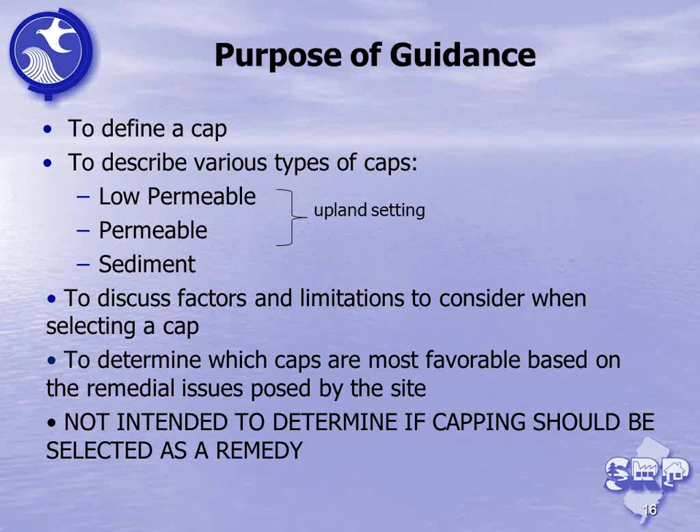Next slide, please. To help define the scope of the guidance document, the committee established several assumptions that I'd like to go over. We assume that the RI process is complete. You know, you went through the PA and SI and remedial investigation process as well as filling out your receptor evaluation form. In terms of containment, which we consider the lateral movement of contamination, that particular movement is really not the focus of the guidance document.

A good example of the lateral movement of contamination and a remedial option to address that would be like a slurry wall. This guidance really focuses on the vertical plane, so that the capping remedy in that instance would address direct contact concerns.

As with any other remedy, a lot of site-specific information needs to be available, and we're assuming that that's been collected and is accurate. A lot of professional judgment will come into play for your site in determining what information is actually warranted. We're going to assume that delineation is complete. We're going to assume that the geotechnical properties associated with the native soils have been established. Can your soil actually support the load of a cap? These are some of the things that we're going to assume the reader has actually accomplished.

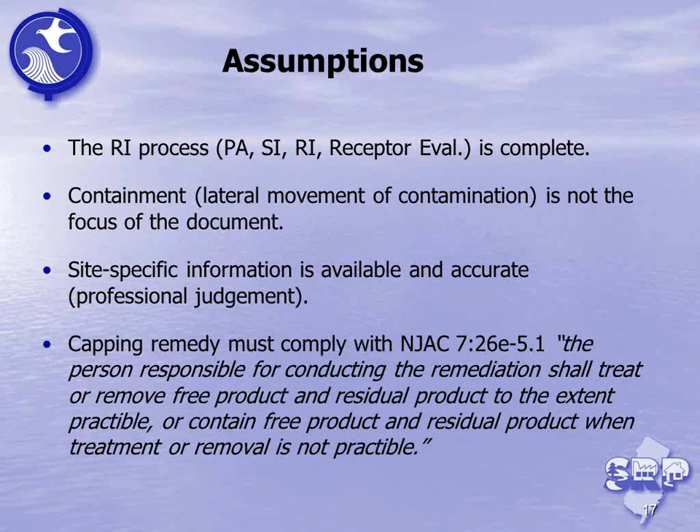Okay, so in the simplest of terms, a cap is a barrier located over contaminated media that mitigates exposure. All capping remedies must be protective of human health and the environment. A cap does not decrease or actually reduce contaminant concentrations, at least in the short term. Again, caps are primarily effective by actually mitigating exposure.

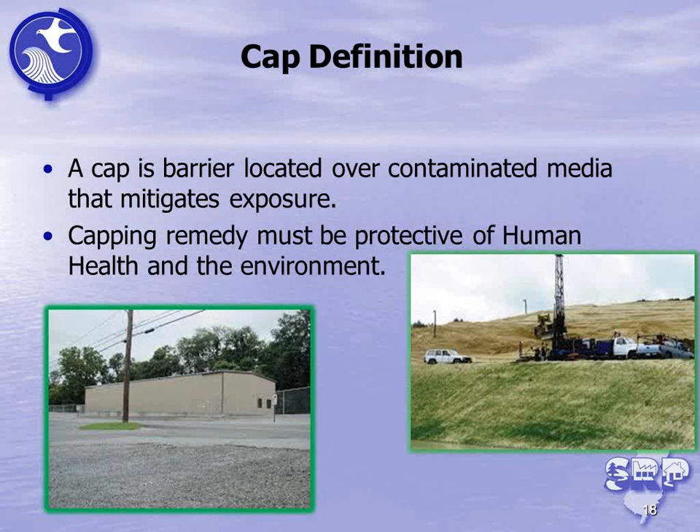As you can see from the pictures here, caps are commonly used as remedies with a variety of end uses. Asphalt caps are typically used as parking lots and roadways. Concrete caps are used as building slabs and foundations, and are also used where heavy-duty vehicle usage is anticipated. Soil caps might be warranted when a cap should be permeable. Also, soil caps can be vegetated. And lastly, as you can see in the picture on the right, caps are often used as landfill remedies. Next slide, please.

Okay, I just want to touch on some regulatory requirements and permitting issues that may or may not be associated with caps, again, depending on site specifics. A cap is an engineering control and does require a soil remediation permit pursuant to ARRCS, and I'll touch a little bit more on this later. There are various permits or rules that may be required when you construct a cap, and again, they're going to be very site-specific. Some of these permits or rules may extend actually outside of the NJDEP SRP program. If you were to be capping PCBs, there might be federal TSCA rules that you would have to follow.

If your cap was going to infringe on ecological habitat or deal with stormwater issues that actually discharge to surface water bodies via outfalls, you might have to deal with an Army Corps of Engineers nationwide permit. If your cap was going to include the stabilization of a bank along a major waterway, again, an Army Corps of Engineers permit might be required. If your cap was to extend into freshwater wetlands or be part of a waterfront development project or perhaps extend into a floodplain, you're going to need these types of permits from our land use regulation program.

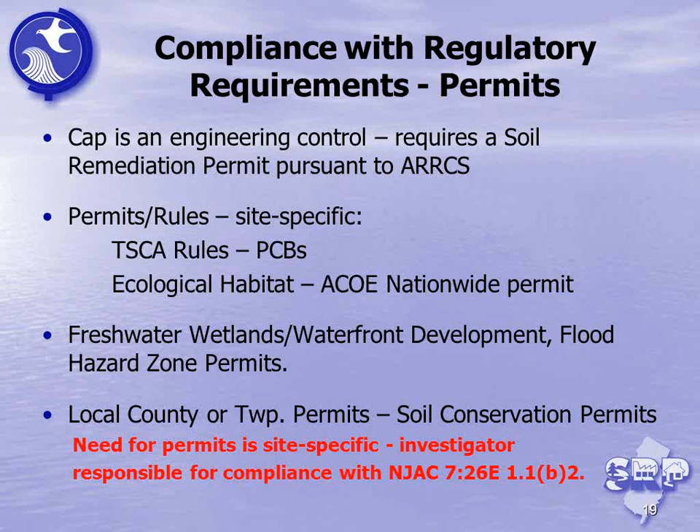On the local side, you might need actually local or county permits for cap construction. An example of this would be a soil conservation permit. Obviously, the need for these types of permits is very site-specific, but the Tech Regs require at Section 1.1b2 that it's the investigator's responsibility to ensure compliance with all federal, state, and local statutes or regulations. Next slide, please.

Okay, on to administrative requirements. If any of you are familiar with caps, you know there are a host of administrative requirements that you're going to have to follow. Again, the DEP considers caps as engineering controls. And a deed notice would be required with any cap, since they're covering contamination that's left in place that exceeds our unrestricted use standards. I'm not going to go into the details of a deed notice, but they can be found in our ARRCS document in section C7.

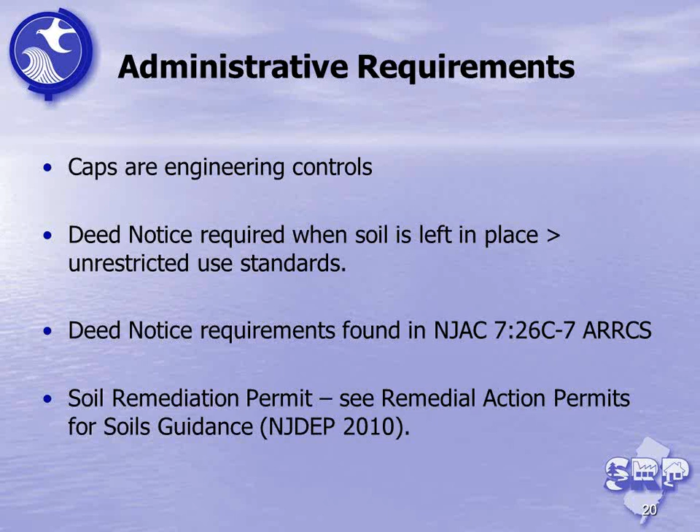And as I mentioned earlier, capping remedies will require that a soil remediation permit be obtained. And there are a host of specifications that are required for those, and they can be found in our guidance document titled Remedial Action Permits for Soils Guidance, which was issued in 2010. Next slide, please.

As many of you are probably aware, the department has issued guidance on presumptive remedies, and you may be wondering how this particular guidance dovetails with the presumptive remedy guidance. The bottom line is that it does not. The presumptive and alternative remedy guidance addresses remedial actions initiated after May 7, 2010, where new construction is proposed for residential purposes, licensed child care centers, public, private, and charter schools. Remedial actions at these types of uses must be to an unrestricted use, presumptive use, or alternative remedy use pursuant to the above guidance.

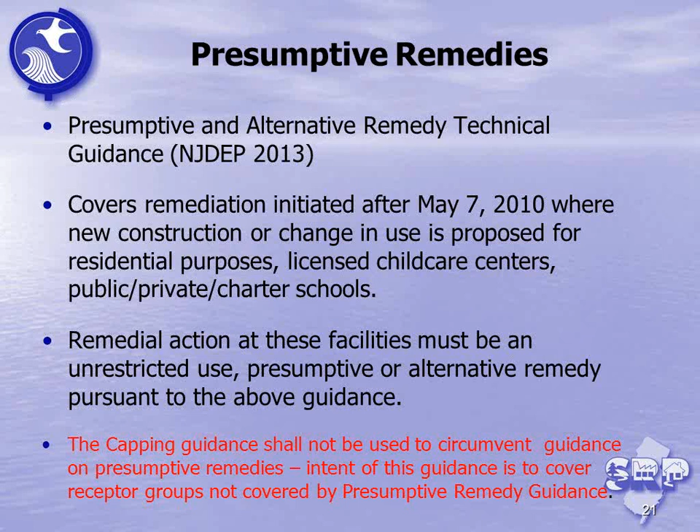This capping guidance should not be used to circumvent the presumptive remedy guidance. The intent of this guidance is to cover receptor groups not covered by the presumptive remedy guidance document. Next slide.

Okay, some technical factors that you should consider for a capping remedy. Some of these are pretty obvious, but you're going to have to understand your contaminant properties. What type of contaminants are you dealing with? Are you dealing with mobile contaminants such as VOCs? Or are you dealing with contaminants that have properties that would allow them to stick to and tightly bind to the soil, such as PAHs or PCBs? What's their distribution? What's going to be the extent of your cap?

What are the properties of the native soil? Is your native soil physically stable? Factors such as particle grain size and the organic content may influence the contaminant mobility of your site. What's the actual bearing capacity of your soil? Can it support a foot of concrete? A geotechnical investigation would be required to answer some of those questions. If your cap is going to be on a slope, are you going to consider veneer stability? We don't want your cap falling off the side of the hill.

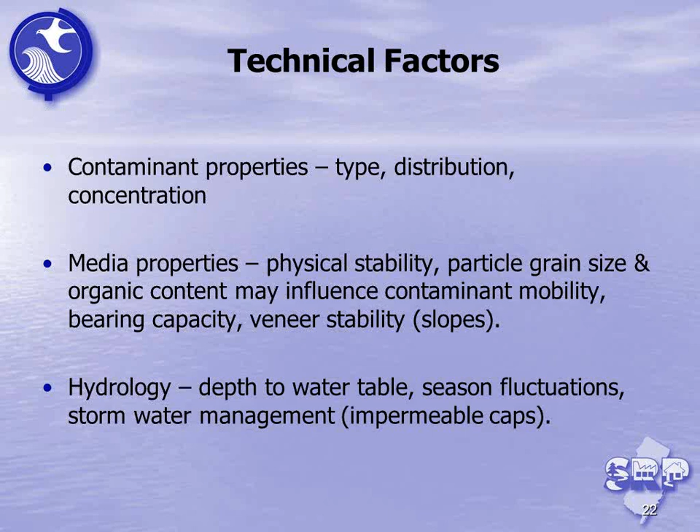Hydrology is also another factor you're going to have to consider. Will your cap come in contact with the water table? Do you have to take into account seasonal fluctuations of the water table? If you install an impervious cap, how are you going to handle stormwater? Again, these are some of the issues that you're going to have to handle. Next slide.

Regulatory factors. What type of receptors are utilizing your site? Your cap design needs to include an assessment of all exposure pathways and receptors. And this is typically accomplished through the completion of a conceptual site model, which all sites should have. The primary exposure pathways that you're going to have to deal with, again, no surprise here: dermal contact, ingestion, and inhalation. Not every site will have all of these exposure pathways associated with it. However, the investigator must evaluate all pathways to ensure that the cap is protective.

Environmentally sensitive natural resources, important topic here. Does your site have wetlands or streams or marshes or any other type of habitat that meet the definition of an ESNR? These require careful evaluation and, again, adherence to potentially regulations outside of SRP, such as our land use regulation program. If you have contaminants of concern in the environmentally sensitive natural resource, the quick answer is not always that you can cap them. We don't want people running out there and just slapping a cap onto a wetland for minimal exceedances of a screening criteria. You would have to evaluate your contaminants of concern pursuant to 1.16 and 4.8, as well as our ecological evaluation technical guidance document.

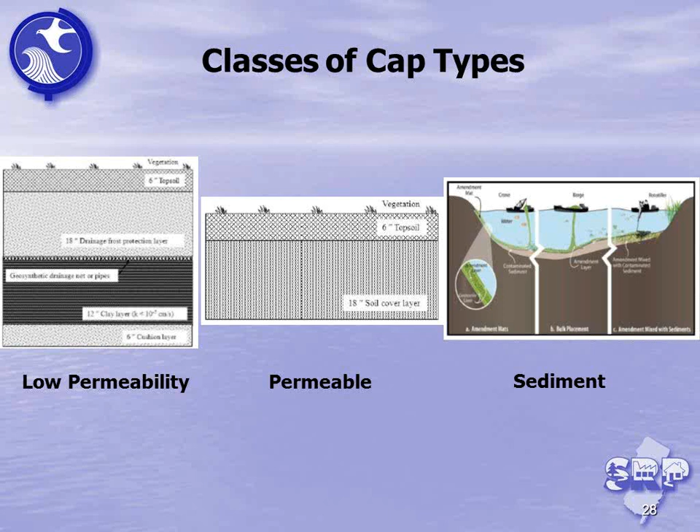I'll be talking about a couple classes of cap types for you this morning. Go to the next slide, please. The guidance document covers three main groups of caps: low permeability, permeable, and sediment caps. I'll be discussing the low permeability caps and the permeable ones, and then the presentation will go back to Greg Newman for the sediment caps. Next slide, please.

Low permeability caps is one specific type of cap. It's really intended to minimize or prevent the transmission of water or vapors through the capping material. Water transmission is just what it sounds like. You're stopping water from coming through the cap and coming in contact with the contaminated soil underneath it. Vapor transmission works in the opposite direction. You're looking to stop contaminated vapors migrating from the underlying strata through the cap and into the overlying air.

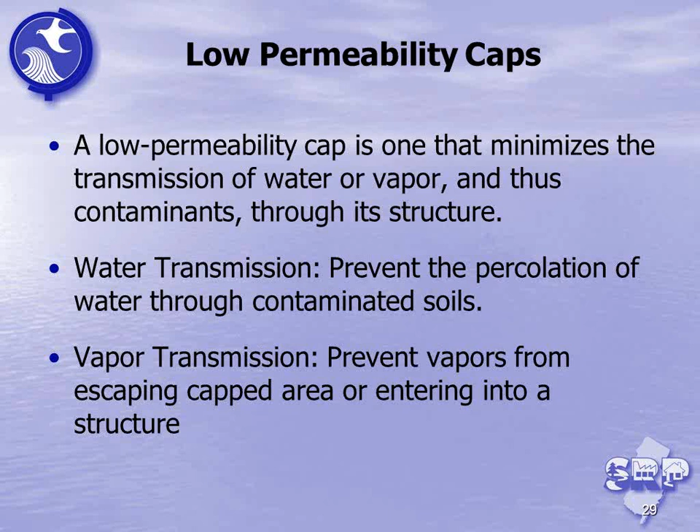There are many things to consider with low permeability caps. You're very likely going to have changes in your water balance at the site. Low permeability cap is stopping water from coming in, so recharge will be minimized. Water transmission is typically measured in centimeters per second. 10 to the minus fifth centimeters per second would be a spec for a low permeability cap. Vapor transmission is measured in perms. It's an ASTM standard, I believe. Next slide, please.

The components of a low permeability cap typically include a soil protection layer. It's not involved in every low permeability cap. The soil protection layer can promote runoff, vegetative growth, help control erosion as well. All low permeability caps will have a low permeability layer. It's the primary component of the cap. It could be constructed of many different materials. Compacted clay can be used, geomembranes, geosynthetic clay liners, asphalt, concrete. We'll talk about another version later that people might know as a liquid boot.

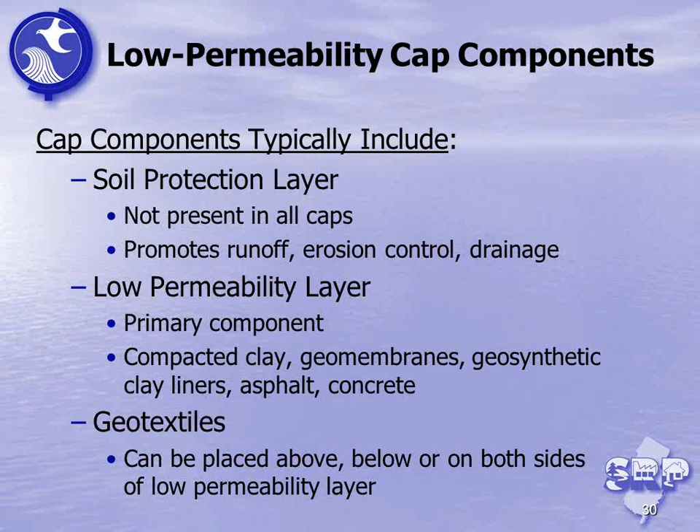Geotextiles can often be incorporated into a low permeability cap. They can be placed above or below the low permeability unit, usually as protection or identification. Next slide, please.

Okay. When you're designing a cap, there's many things to consider, and this guidance. Sorry. How's this? Does this sound better?

All right, good. There's many things to consider when you're designing a low permeability cap. The guidance document provides a pretty good overview, but is not comprehensive. You should consult with an expert while designing the cap. But when designing, you should consider the effectiveness of the cap. Is it going to meet the goals that you've set out? Will it limit the water migration? Will it limit vapor migration? Will it also protect against direct contact?

The compatibility of the cap with the current and future planned site uses, surrounding land uses, and the nature and the extent of the contaminants. The duration of the cap is something else that should be considered. How long is the contamination going to remain in place, and how long you're anticipating your capping material to remain in place?

Stormwater management, like I mentioned before, is likely going to change. Water's not going to be percolating into this cap and recharging the local aquifer. It's going to run off, which could cause erosion, could cause flooding at adjacent sites if you don't manage your stormwater properly. Surface slopes is another thing to consider. The more uneven your terrain, the harder it is going to be to install the cap. There's also geotechnical considerations, the compaction of the underlying soil. Will it be able to support the cap?

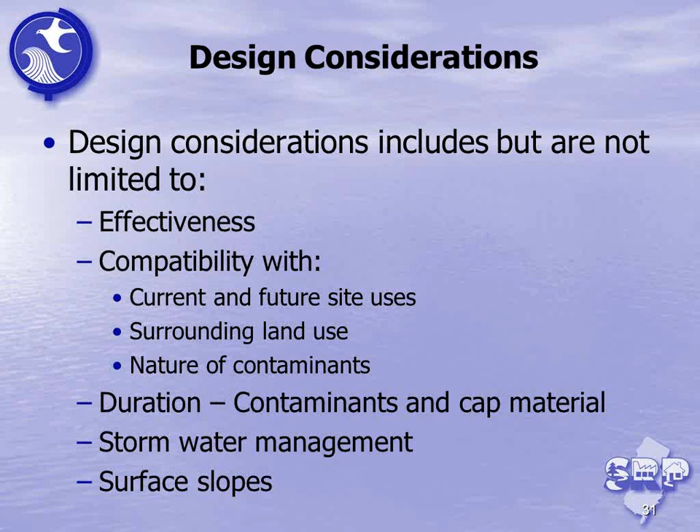And in some areas, you may want to consider the installation of a clean utility corridor for future repairs. If utilities have to be accessed, you may not want future workers going through and into the contaminated media. Next slide, please.

When installing the cap, the first thing that you have to start with is a documented design, considering all the factors discussed in the guidance document and all site-specific factors. You need to design to meet the capping objectives. Once you have that in place, now you have a basis for your design, and you need to show that your cap is installed according to the design. You should have a knowledgeable contractor, one that understands the techniques that need to be used, and it's really recommended to produce as-built figures and conduct surveys.

The cap should generally be installed according to the design. As with everything, once you get in the field, there's probably going to be minor deviations or changes to the design. You need to assess them, see if they will impact the functionality of the cap or the effectiveness, and as-built figures and surveys should be used to document how the actual installation of the cap differs from the design.

These caps are typically long-term remedies, and so the cap may be around for 30 years, so the better you document your actual conditions, the easier it's going to be in the future to be able to answer questions when people ask, what is the thickness here? How was this installed?

Quality control and inspections throughout the installation of the cap are also going to be important. They're going to show that you are meeting the specs of the cap. This can include the base material preparation, compaction, or surcharging to help prevent differential settlement later on in the cap life. You want to make sure there's no sharp objects protruding from the cap, which may penetrate a synthetic liner.

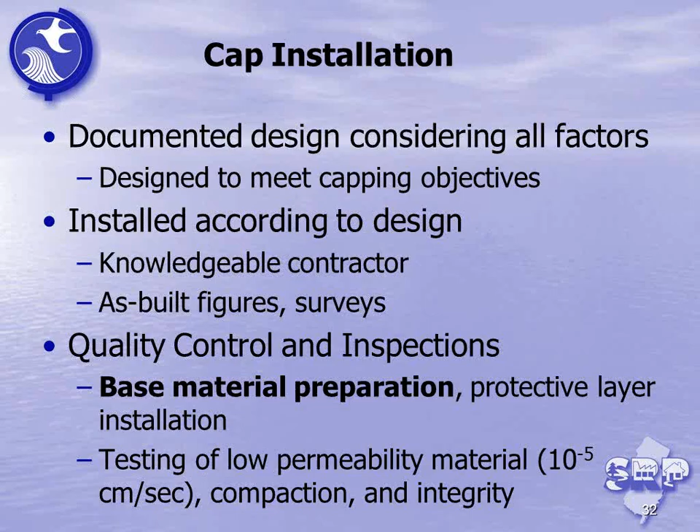And the question is, the design of a cap should consider which of the following components? A is stormwater management, B is slope stability, C is compatibility with current and future site uses, or D, all of the above.

We have people yelling it out in the audience, and I think that answer is correct. But we're not going to say what that answer is because the webinar audience would probably be upset that we gave them the answer. So we're going to allow them to answer themselves. Again, we're going to give them some time to vote here. Hey, we got 90% voting this time. Joe, did you vote twice? No, okay. 92%, 93, 94. Hey, that's pretty good. That beats our last one.

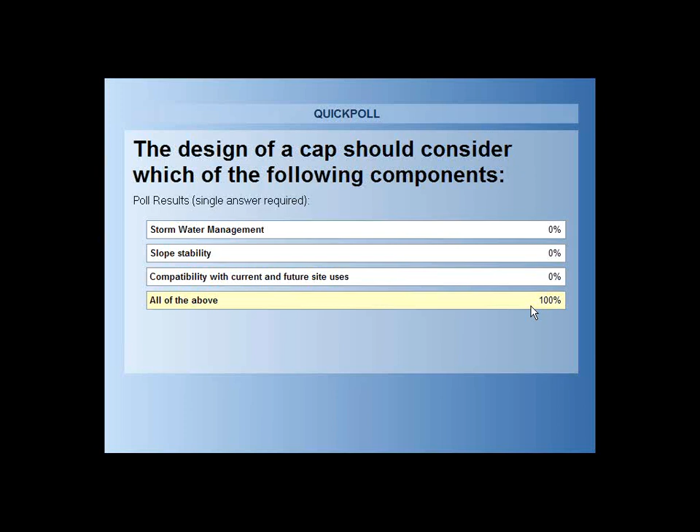Okay. Now that you've installed your cap, we'll talk about the operation and maintenance of a low permeability cap. First off, routine inspections are going to be important to ensure that the cap is functioning, meeting all of its design goals. These inspections can include testing for water or vapor transmission, looking for evidence of off-site impacts. Is there increased stormwater runoff, as well as just mechanical problems with the cap? Are there ruts? Are there holes in the cap?

The frequency and the techniques that you use in your inspections are going to vary depending on the cap type and setting. As we'll discuss later, a concrete slab can be treated very differently than a compacted clay cap. A parking lot is very different than a low permeability cap with a grass surface on the top.

During these inspections, too, you also need to assess for repairs. There's going to be routine repairs that happen through the lifespan of a cap. Small things, if you imagine an asphalt parking lot as a cap, there's going to be potholes. Those potholes need to be patched. The pothole minimizes the thickness of the cap, and you have to address them.

There's also likely going to be major repairs through the lifespan of the cap. These are going to be bigger. This would be something, if we go back to the parking lot example, milling and repaving maybe 20% of a parking lot. It's likely going to happen, and these repairs should be considered in your financial assurance. You should plan for them.

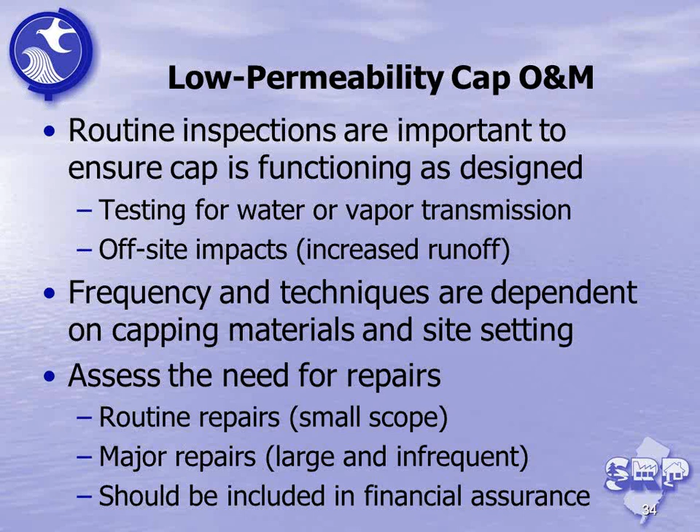It's more to look at for your operation and maintenance of a cap. Your inspections should include assessments of a lot of things. These are just some of them here. Incompatible human activities: are people going out and digging holes in the cap? Are they gardening? Are people driving heavy vehicles across the cap in places that they're not and creating large ruts that minimize the thickness of the cap?

Is there evidence of burrowing animals? You have gophers on site, digging holes through your cap material and ultimately into the contaminated media below and bringing that soil up to the top of the cap. Do you have deep-rooted vegetation that shouldn't be there? Again, puncturing holes through your low permeability cap. Once you poke a hole in it, it's not going to stop water transmission anymore.

Surface settlement is an important issue, especially differential settlement. If you're using a clay liner or a synthetic liner, you can generate shearing forces and cause tears if you're not settling evenly across the site.

Erosion control, erosion channels forming, desiccation and cracking of a clay layer, or evidence of UV degradation for an exposed membrane, migration of pore water up into the cap, diffusion of contaminants through the cap, vandalism, and perhaps even checking for the presence of gas buildup beneath the cap would be things to consider during your operation and maintenance.

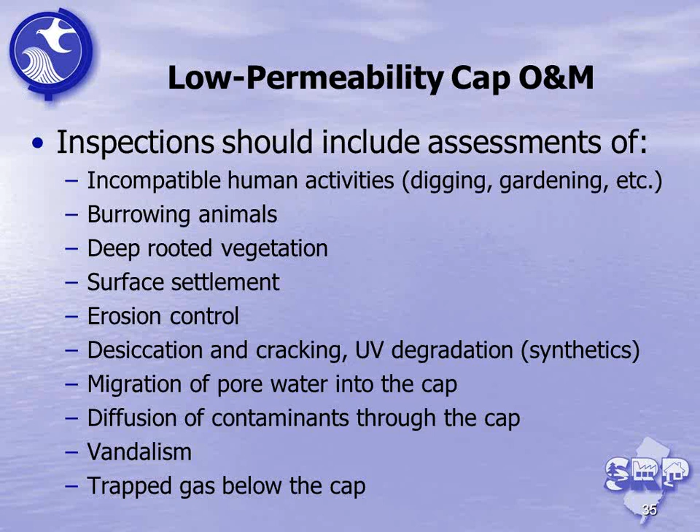Next slide, please. All right, so now I'm going to discuss a couple specific types of low permeability caps, and I'll start off with landfill closure caps. These caps can be very prescriptive according to the regulations that control what's being capped. RCRA, TSCA, NJDEP hazardous waste and solid waste regulations may apply. You should really check those regulations to see if they spell out exactly how your cap needs to be constructed.

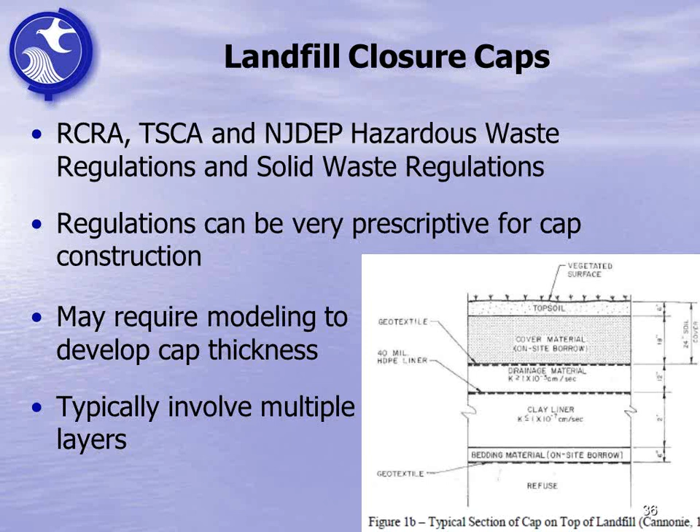You may need to run a model. And these cap types will typically involve multiple layers, from a cushioning layer to the clay liner, drainage sand, and a topsoil layer. They're going to be different for every one of these regulations.

Next slide, please. Another type of cap that can serve a low permeability function is a structure cap. These could be a lot of different things, starting with building slabs, asphalt parking lots, or other large concrete structures. What's different about this type of cap is that the low permeability layer is usually exposed on the surface. That might mean more frequent inspections and more frequent repairs to the cap material.

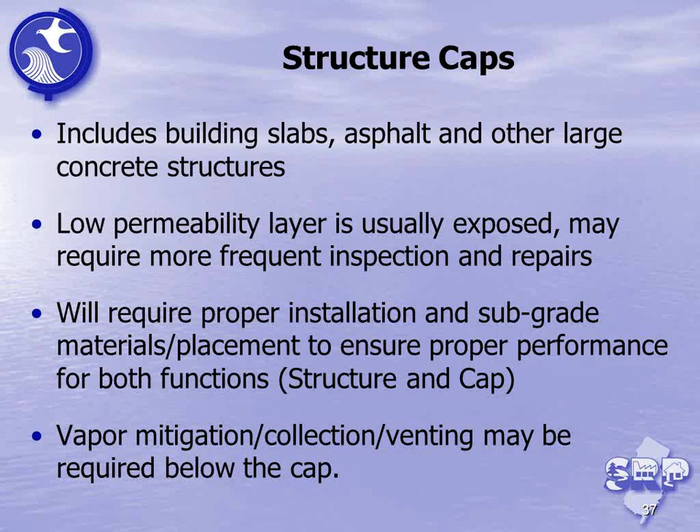One thing that's important to consider is the preparation of the subgrade material for structure type caps, because the cap is serving a dual purpose. It is serving as the foundation of a building or the bottom slab of a building, and it's also your cap to prevent direct contact and migration of water or vapors through the cap. So you need to be prepared to have the cap function in both purposes. And one thing to consider too is perhaps the need for vapor mitigation or control underneath the building if that is your low permeability cap. Next slide, please.

Okay. Now, not necessarily a type of low permeability cap, but a layer that could be incorporated into low permeability caps is a capillary break. A capillary break is used to prevent the upward migration of pore water and dissolved contamination through the cap material onto the surface of the cap, where that water may evaporate and leave your dissolved contamination behind. Capillary break layers prevent this by stopping that capillary rise.

They can be constructed of coarse-grained material so that the interstitial space between the pores is bigger. You don't have quite as high a capillary force, and so you won't get as much of a rise. Or geosynthetics can be used. This type of layer can be incorporated into low permeable or regular permeable caps. It's not specific to low permeability caps.

One of the primary concerns for this layer is hexavalent chromium, where you put a direct contact cap down and you have groundwater level fluctuations rise, and the water comes up through the cap carrying the dissolved phase chromium. Once it evaporates, you can have green and yellow staining as the chrome mineral deposits on the surface of the cap, which then can redissolve or be transported somewhere else outside of your capped area.

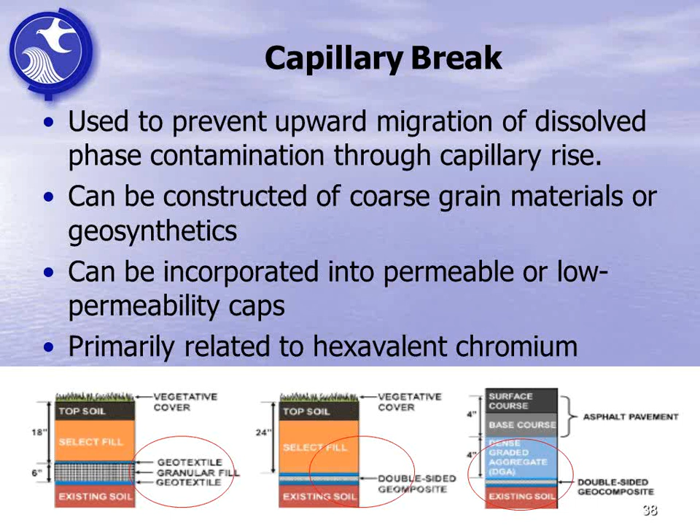Now on the figure here, I have some examples of the use of a capillary break layer. The bottom left is granular fill. The two on the right are examples of geocomposites, one with a permeable cap and one with a low permeability cap. Next slide, please.

Wanted to apologize for Howard. We actually made that figure bigger. If you notice, the circles didn't quite line up. We forgot to move the circles. So if you guys were wondering why certain things were circled, Howard had it right. Sorry, Howard, we screwed your slide up. But he had it right. That's not a problem. That was the secret quiz question. Make sure everybody was paying attention.

All right, another, again, not necessarily a cap type, but a cap layer that can be incorporated into your overall cap is a vapor barrier. Vapor barriers are what they sound like. They're used to prevent the migration of vapor from underneath the cap to above it. The capping guidance document focuses on the use of vapor barriers in outdoor settings.

The use of vapor barriers for indoor, like we mentioned with structure caps, is covered in the DEP's Vapor Intrusion Technical Guidance document. That should be consulted to make sure your vapor barrier reaches spec and that your cap type for a structure cap complies with this document.

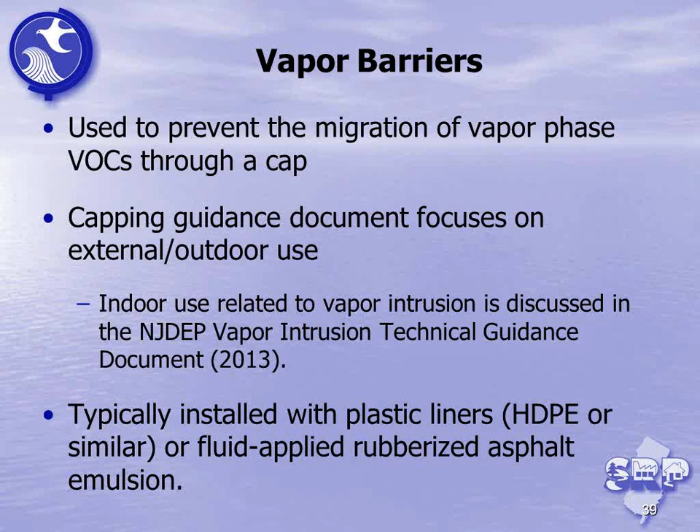These can be typically installed with plastic liners, HDPE or something similar, or with a fluid-applied rubberized asphalt emulsion, which is like a liquid boot. It's a spray-on application. It's very good in some settings. There are other manufacturers other than liquid boot. This is not a very typical cap type, but again, it may also warrant vapor collection. If you're putting in a vapor barrier, you should look to your need to remove those vapors. Next slide, please.

Okay. Shifting over, I'll talk about permeable caps. Same kind of setup. We'll go through some of the commonalities between all permeable cap types, and then we'll discuss a few particular types of permeable caps. In general, a permeable cap is an engineered cap that allows for the exchange of water and soil gas from the subsurface into the above environment.

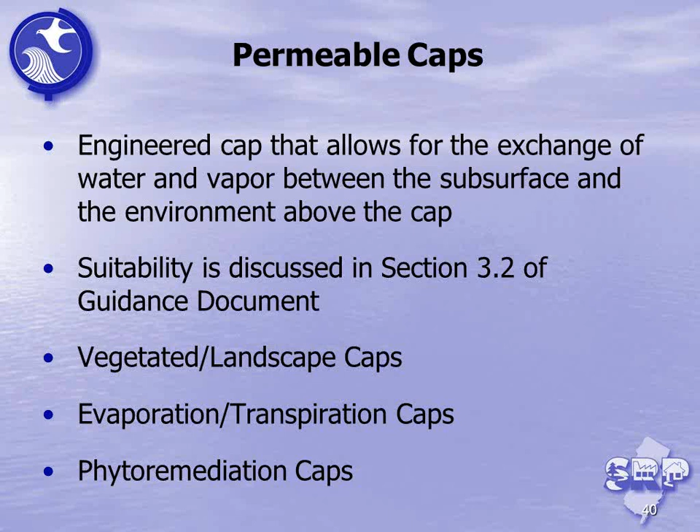The suitability of permeable caps is discussed in section 3.2 of the guidance document. Didn't want to try to summarize it here. Go into the guidance document and take a look at it. There's a very good discussion that doesn't lend itself to paraphrasing very well. Specific types of permeable caps we'll discuss will be vegetated or landscape caps, evaporation and transpiration caps, and phytoremediation caps.

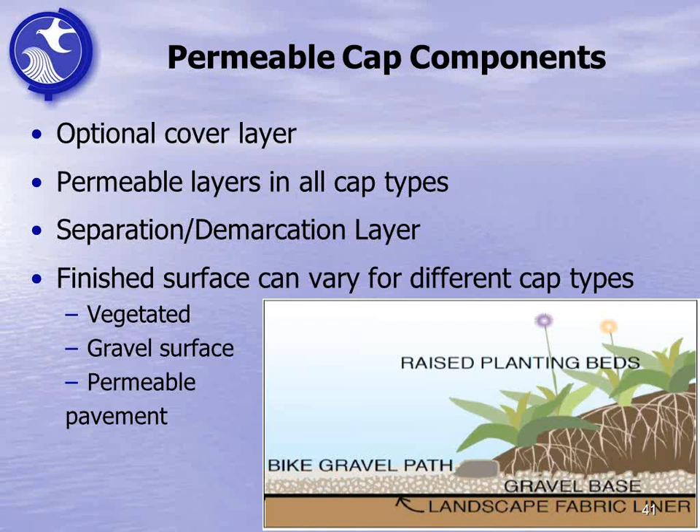All right, when designing your permeable cap, there's a few things you should consider. The thickness is important. The thickness of the cap has got to be sufficient to, one, protect against direct contact, two, provide ample protection against weathering and erosion, and it's got to be thick enough for the specific site use, both current and what you can reasonably anticipate in the future. If you expect vehicle traffic or heavy vehicles, you may need your cap thicker to be able to withstand rutting. You don't want to put in a 6-inch rut and have it go all the way through your cap.

Depth to water or changes in the water balance, mainly applicable if this was an area that had an impermeable surface and now you're giving it a permeable surface, the groundwater table may rise. There's going to be geotechnical requirements. Can your underlying soil handle the capping material? Will it settle? Will it differentially settle?

Permeable caps can also incorporate the existing site surface. This could be used if you have historic fill on the site that's already a little deeper than the top several feet, or for a deeper release of contamination, or for even historic fill, and then somebody comes back later and puts down clean fill. You may have a permeable cap on site already, but you still need to assess it for its effectiveness.

These can be used in wetland settings, like Greg said. You don't want to put an impermeable cap in a wetland setting because then groundwater is not going to recharge. And again, you might want to consider a clean corridor for utility access if you do have utilities running through your capped area.

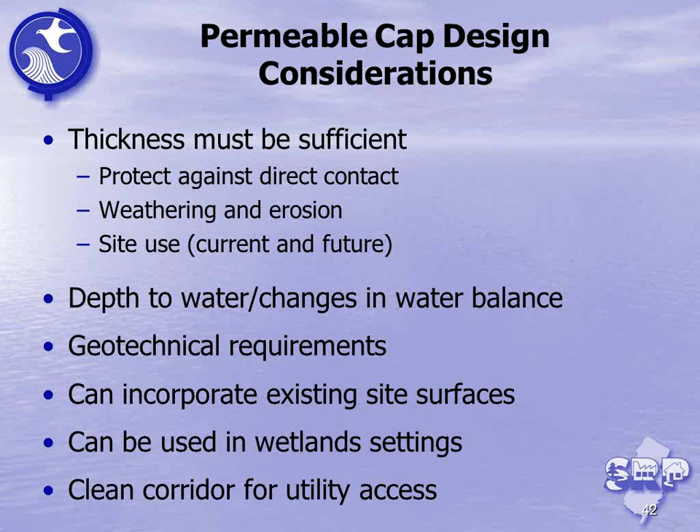All right, the installation of a permeable cap, again, documented design, and you need to document that the construction conforms with the design, or document any deviations from the design. Surveys and as-builts are important. You'll need them for the future too, because again, the cap is likely going to stay around for a long time. So a well-documented installation is important to show exactly what you have on site.

There are many different materials that you can use for the installation of a permeable cap. You should check with the Alternative and Clean Fill Guidance document from the DEP 2011 to make sure that the clean fill that you're using conforms with that document. You could use dredge material. There's a lot of different sources that you could use to build up your cap layers.

And if your cap is going to incorporate vegetation, you need to establish that vegetation. You should have topsoil on site or on the top that can support vegetative growth. And you need a monitoring plan. It's not just enough to plant the plants. You're going to have to watch that they grow, that they're thriving, and come back periodically to make sure that the plants do remain on site.

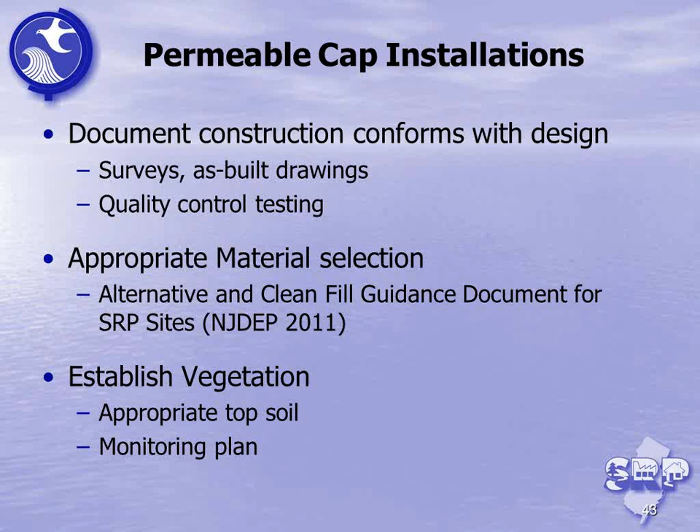A little more O&M. You need to conduct inspections to ensure that the cap thickness is maintained through the lifespan of the cap. You should be looking for things like erosion channels, slope failures, or maintenance of slopes. Do you need to add more soil onto side slopes? You should be looking for burrowing animals and toppled plants, and ruts from vehicle traffic. Burrowing animals, you have to control.

Toppled plants, especially once a deep-rooted plant comes down, you're left with a hole in the ground where you might be exposing the underlying contaminated media. You need to go back and refill that hole and maybe recompact the area.

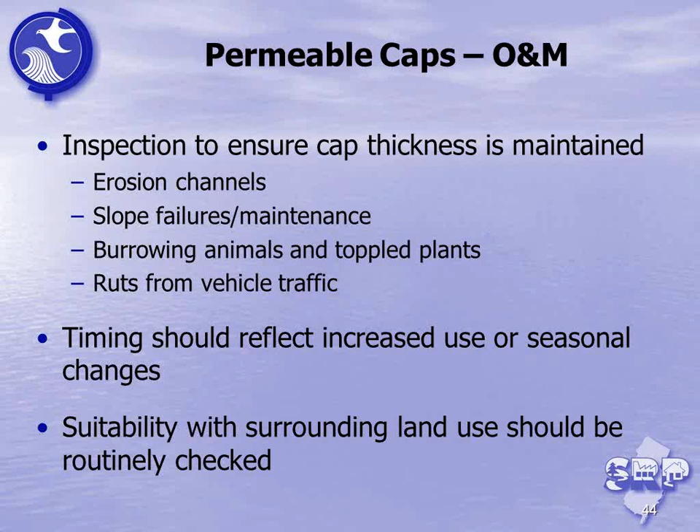The timing for the inspection should reflect increased use or seasonal changes at the site, and you should continuously check for suitability with the surrounding land uses. It could be something like land around the site being developed and increased stormwater runoff coming onto your site from impermeable surfaces surrounding it. Okay, next slide.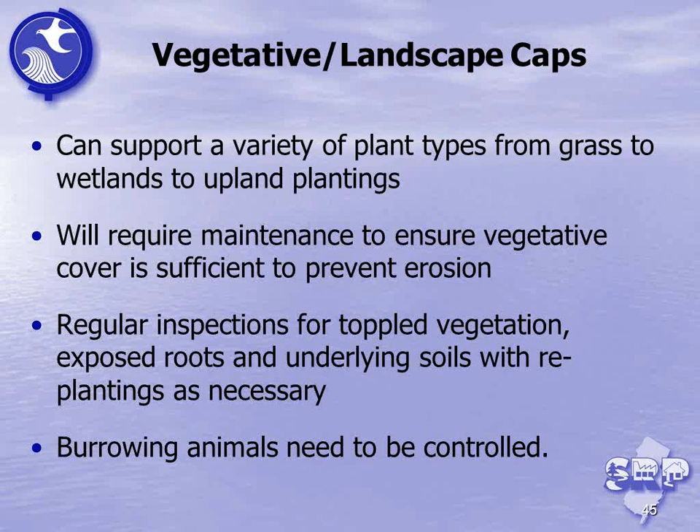Okay, here we go again for the webinar audience, checking your participation. Again, you guys can all play along in the audience here. The question is, inspections of a vegetative cap can stop once the vegetation has been established. How many think that is true? How many think that is false? You guys are pretty good. You're really paying attention. I like that. We'll see how well the webinar audience does.

And actually, one kind of interesting part of this webinar series is that we actually know everyone who answered and how many people got it right, which is good. Wow, looks like everyone was on the board. Joe, did you answer the 1% there? Was that you on the 1%? Okay. All right, good. We can close that out.

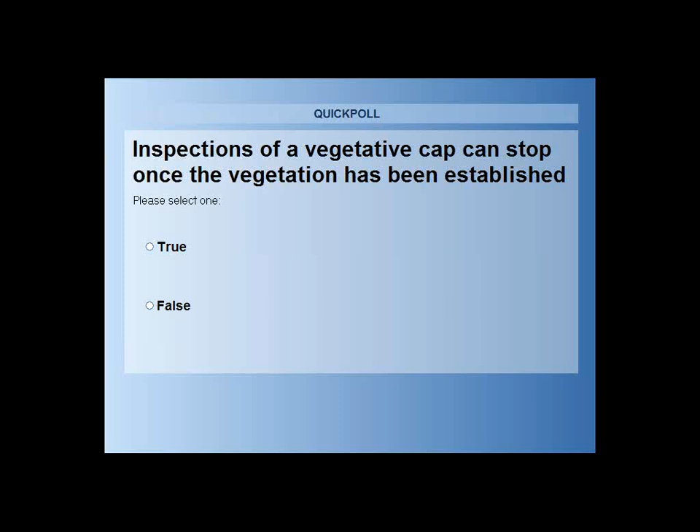Okay, the second type of permeable cap to talk about is evaporation and transpiration caps. These are used to regulate the percolation of stormwater into the underlying contaminated media, but they don't do it with an impermeable layer. Typically, you conduct a model where you're trying to assess the water balance, and you're trying to balance precipitation against surface runoff, evaporation, and uptake from the plants, transpiration. So really, it serves a similar purpose to a low permeability cap, but all of the material is permeable.

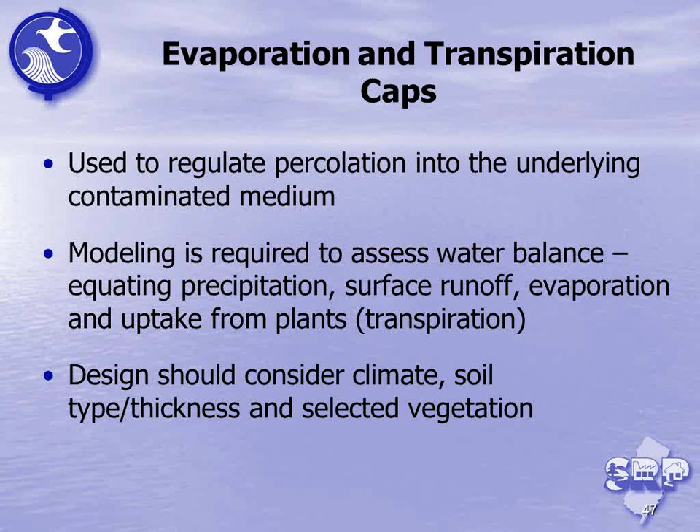When you're conducting the design, you should really be considering your climate, the amount of sunshine that's going to be hitting your site that causes evaporation, the thickness of your cap, and the selected vegetation. Is it grass? Is it trees? What's the anticipated rate of water uptake for each individual plant species? Next slide.

And lastly, phytoremediation caps. Very similar to vegetative caps, but the main difference is the plant species itself is expected to conduct remediation, either by immobilizing contaminants or removing them or even destroying them in place. There are many technologies and mechanisms for phytoremediation. They're appropriate for different contaminant classes and types and for different plant species. For an example, sunflower plants are good at uptaking heavy metals. Poplar trees are good at taking up a lot of groundwater and can transpire some VOCs.

The ITRC has a lot of good guidance on phytoremediation. You can go to their website and they'll provide you a lot more information about specific classes of phytoremediation and specific types of plants and contaminants for those types of phytoremediation.

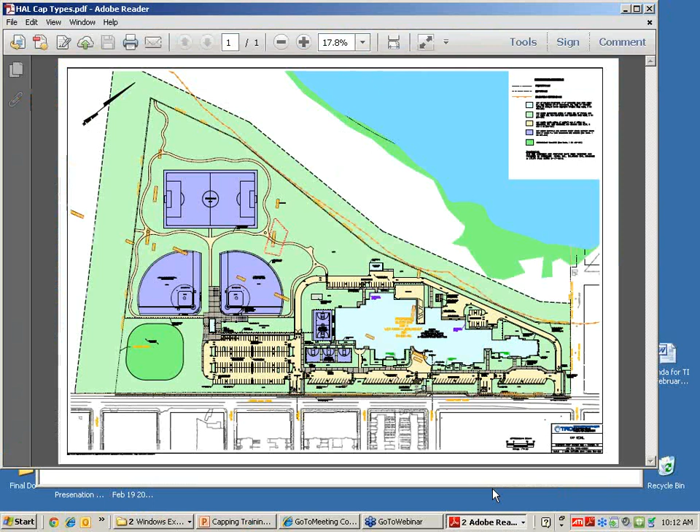Next slide. Okay, actually what we're going to do real quick is, this isn't in your slide handouts, but Howard and Greg, or Howard especially, had a site where they had a lot of these different cap types, and they were just going to do a quick case study, and then we'll move on to questions. So Howard? Okay. Can everybody still hear me?

Okay, this is a site that I worked on with Greg a little while ago. It's the Harrison Avenue landfill, and it's an example where a lot of different capping types were incorporated all in one site. You can see the figure is color coded. Ball fields in purple, a recharge basin in deeper green, permeable caps in the lighter green, and impermeable surfaces in tan. The impermeable surfaces are essentially asphalt caps with sub-base material, no recharge through them.

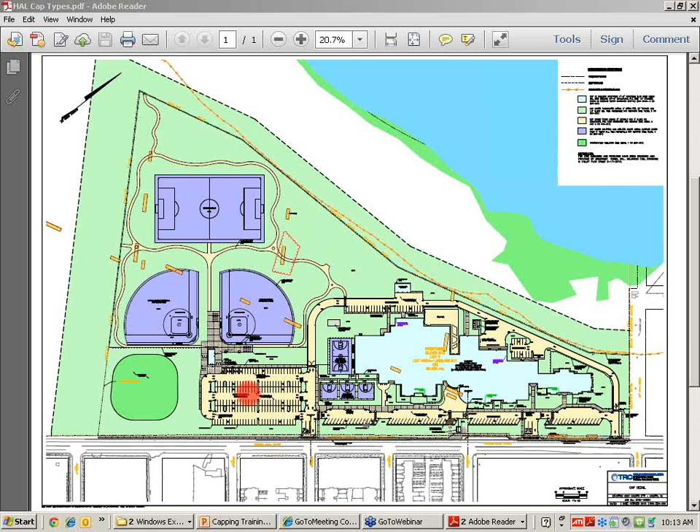For the most part, the rest of the site, though, was allowed to have recharge. There's some astroturf on the playing fields, but there's a lot of other landscaped areas. The building itself served as an impermeable cap. Most of the waste material, though, was taken out from under the building. So when you have a site that you're looking to cap, you don't have to keep everything to one specific cap type.

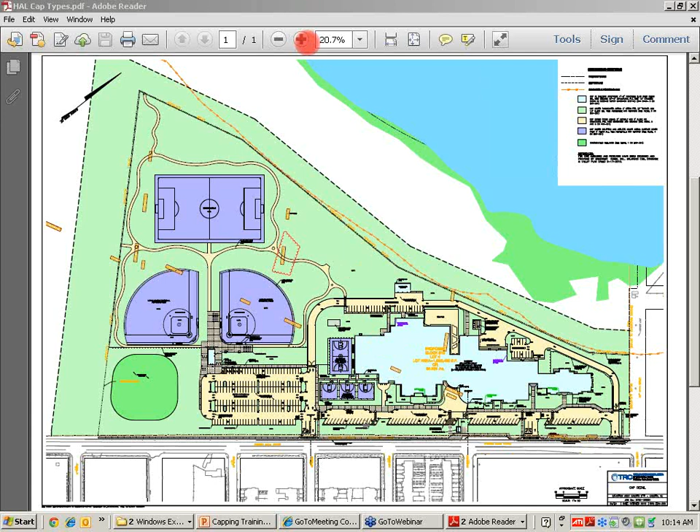Another interesting thing about this project was the source of most of the capping material came from a local CDF, a dredge material repository. We were able to get access to that material at a much lower cost because it was just sitting in this depository. Saved a lot of money for the project. And it also had the benefit of opening up the CDF to be able to receive more dredge material, which came from navigational dredging on the Delaware River.

Thanks for zooming in. And so, again, we got landscaped areas. Here, let me get the clicker. All surrounding the building. We have our access roads. The preparation and the sub-base material was a little different in those areas. The ball fields, for the most part, are really just permeable caps, soil built up over the underlying material, and then we had this recharge basin in the bottom.

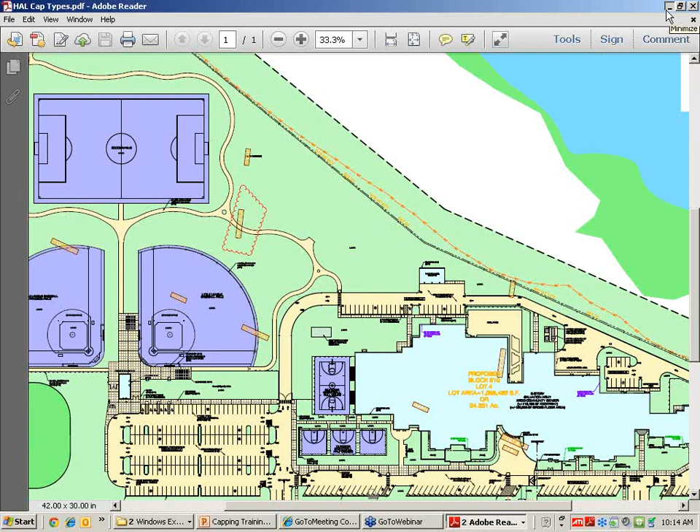That's good. The recharge, yeah, it was like a stormwater basin. We allowed the water to... Oh, I'm sorry. There was a question: was the recharge basin a permeable cap too? And the answer is yes. We were looking for water to infiltrate back through that basin.

All right, we'll open it up to questions then. We have some from the floor. Kathy, you got that one in the back? Yeah, I apologize, I haven't read the document completely yet, but... Just one, if we could, when you ask a question, if you could just introduce yourself, what your name is, and company. Dave Russell, LSRP with AECOM. Okay, great. Thank you.

Does the document specify specific thicknesses of the caps? Like a permeable cap, you need 6 inches of topsoil, 12 inches of clean fill before you... Nope. No, it does not specify minimum thicknesses of caps. Okay, then the second question is, because I believe the presumptive remedy guidance does. Yep. Okay. The second question is for existing caps.

Is it addressed in the guidance document if an existing cap, an asphalt cap at a site, is sufficient? Or is that, again, going to be a professional judgment of the LSRP? Are you asking whether or not, for a cap that exists, the guidance document says this is no good or it's still good? I think it's professional judgment. Okay. Yeah.

Question? Devang Patel, LSRP. I saw on your slide there was a utilities crossing through your cap. Yeah. So that is an easement. How do you handle the easement when you have a soft cap or hard cap on the easement? Have you had any issues with the easement? Township approval is needed for that?

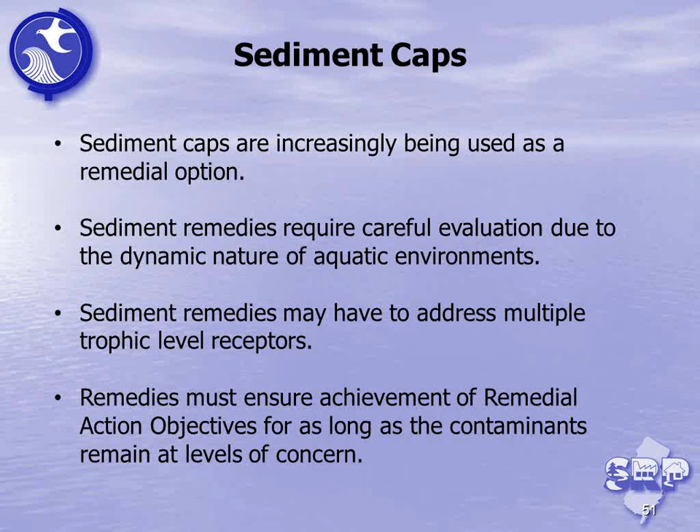So again, the need for actually any type of remedial action, including sediment remedies, really has to be determined pursuant to the tech regs at 1.16, which requires an evaluation of your ecological component for your site. At this stage, you're identifying the presence of environmentally sensitive natural resources. Those are your habitat types like wetlands and streams and so forth. You're also identifying whether or not your contaminants of concern exceed your ecological screening criteria. And we have a list of those available on our website.

If both of those conditions are present, then you're going to move forward into Section 4.8 of the tech regs, which requires a remedial investigation of those ecological receptors. And at this stage, you're really trying to figure out whether or not there's actually a migration pathway on your site linking your contaminants of concern to your environmentally sensitive natural resource. So again, once all three of those conditions are met, then you're moving into the ecological evaluation guidance document, which requires that a risk assessment be done to determine whether or not those contaminants of concern are actually posing an unacceptable risk to the receptors that are present at your site.

So again, we don't want people running out and capping their environmentally sensitive areas. You actually have to go through the risk assessment process to determine if a remedy is warranted. There are two types of caps that we're going to cover under the realm of sediment caps. We're going to talk about a conventional cap, which is used to provide a barrier between the impacted sediments and the overlying surface water. And we're going to talk about amended caps, which is a cap designed to provide some component of treatment and or increase the sequestration of contaminants. And this is typically accomplished with the addition of sorptive material to your capping media.

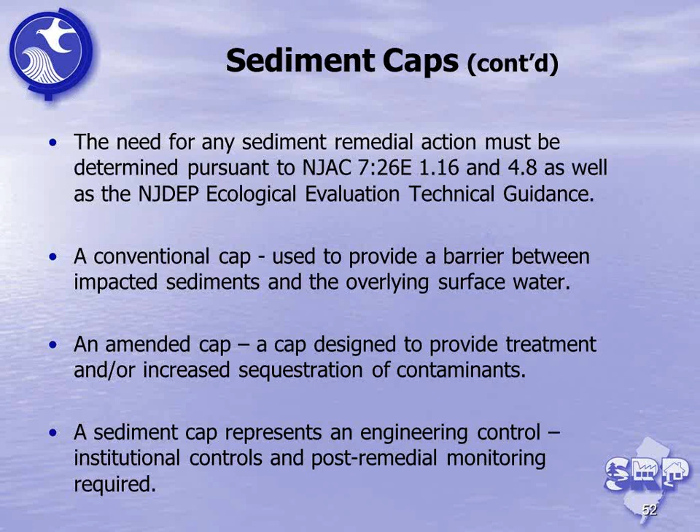Okay, on to design considerations and data needs. Site conditions, more than any other factor, will greatly influence the feasibility of capping in the aquatic environment. It's critical that adequate data exists to effectively design and construct a cap. The level of data needed will be driven by site specifics as well as the complexity of the cap itself. Site characteristics do actually influence all phases of the capping project, namely through design, construction, as well as after the cap is in place with monitoring.

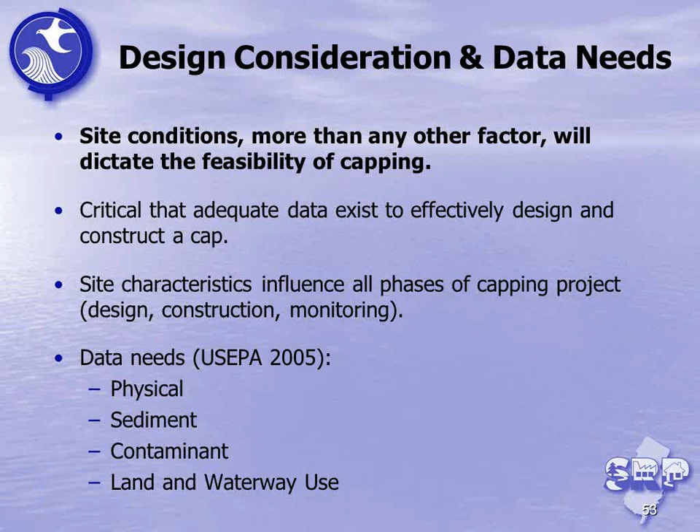EPA has identified 4 broad categories of data needs, namely the physical, sediment, contaminant, as well as land and waterway use needs, and I'll touch briefly on these in the coming slides. Next slide.

Okay, these are just some of the physical factors that may influence your capping design. You're going to have to consider hydrodynamics as well as erosion. Your cap has to be resilient to erosion, and this is going to vary depending on the type of river and the water velocities and currents that are present at your particular site. You're going to have to figure out what type of flow you have there. What is the rate of flow? You're going to have to account for 100-year storm events. You don't want to find out after a major storm event that your sand cap that you spent over $1 million to place is now 2 miles downstream.

What is the deposition rate of your area? If you put a cap down in a section of a river that has a natural deposition rate, that's a positive. That's going to increase the cap thickness, and that leads to a more protective cap as well as a more durable cap because it's constantly being replenished through the natural deposition process.

Water depth can play a critical role and influence the design of your cap. You might be on a water body where there's navigability, and you're going to have large vessels going up and down your river that need a certain amount of depth in order for their hulls not to scrape the bottom of the river. So you're going to have to take that into account. You might not be able to put down a 2-foot cap in that area on top of the native sediments. You might have to first excavate and then place your cap.

Water depth also plays a critical role in terms of the ability to actually deliver the amendments or the actual capping material to the sediment media. Applying a 1-foot sand cap over a stream that's 6 foot deep with slow water velocities is fairly easy. Applying a 1-foot sand cap through 30 feet of water column with constant flow, a little bit different. You're going to have to design for that.

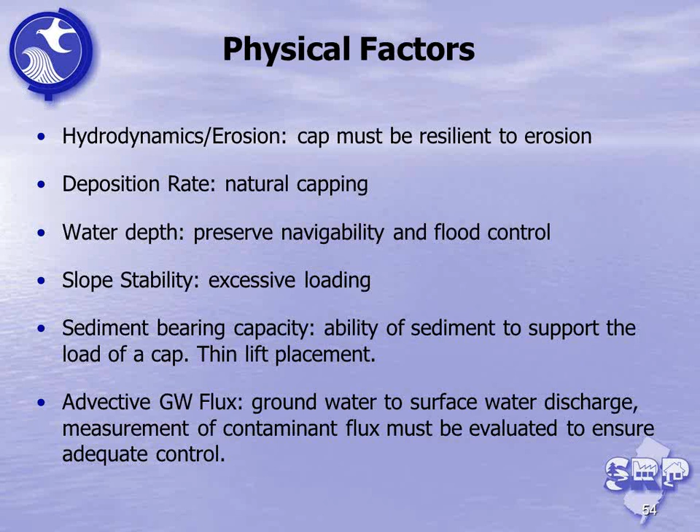Do you have advective groundwater flux associated with your site? Is groundwater discharging to surface water through the sediments? You're going to have to account for this in your cap design, especially if you're trying to implement a low permeability cap. Next slide.

Okay, on to some sediment factors that you're going to have to consider. Bioturbation describes the process of benthic organisms moving sediment as a result of their burrowing and feeding activities. Benthic macroinvertebrates are those critters that actually live in the sediment media itself. This slide here on the left shows an assemblage of various benthic macroinvertebrates. The middle picture is actually a picture of an Ephemeroptera species, which maybe some trout fishermen in the audience might be familiar with. This is the nymph stage of that species.

And the picture on the right actually depicts the first foot of the sediment column. And this was taken with a special device called a sediment profiling imaging camera. And as you can see, with the darker sediments on the bottom, they're being mixed and pulled up into the top foot of sediment. So it's critical that your cap thickness must be greater than the effective mixing depth for the cap to remain effective.

So if you've got a foot of mixing, you have to put down a minimum of 1 foot of cap because you're going to expect those benthos that recolonize your clean sediment cap to be mixing up to that depth. If you were to put a 6-inch cap over that type of a scenario, those benthos are going to end up bringing your contaminated media from the 6 to 12-inch increment up into the surface of your cap, and now your cap surface is no longer clean.

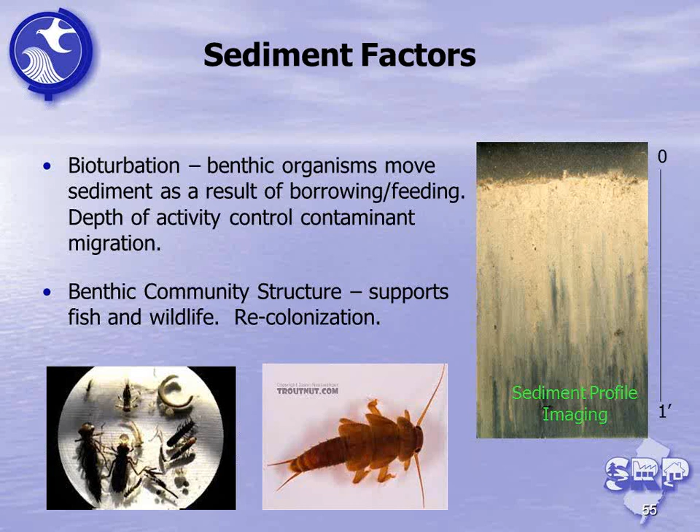Waterway use factors. It's critical that you consider your upgradient background sources if you're intending to place a cap in a river system. The effectiveness of capping can obviously be offset by the continued deposition of contaminated sediments onto the surface of your cap. You have to be aware of this and take that into account if you're considering a capping remedy. You would determine what your upstream concentrations are by performing a robust upgradient sampling approach.

What type of access does your site afford you? Do you have actual room for staging and processing cap material?

Is your cap going to be in a navigational area that receives maintenance dredging? We don't want to find out that your 2-foot sand cap has just been dredged by the Army Corps 2 years later. Is your site subject to recreational use? If you're going to implement a cap that has a geotextile, perhaps at 6 inches or a foot beneath some clean material, is your area going to be subject to recreational boating where you might have anchors digging into your cap? Again, something you're going to have to consider in your cap design.

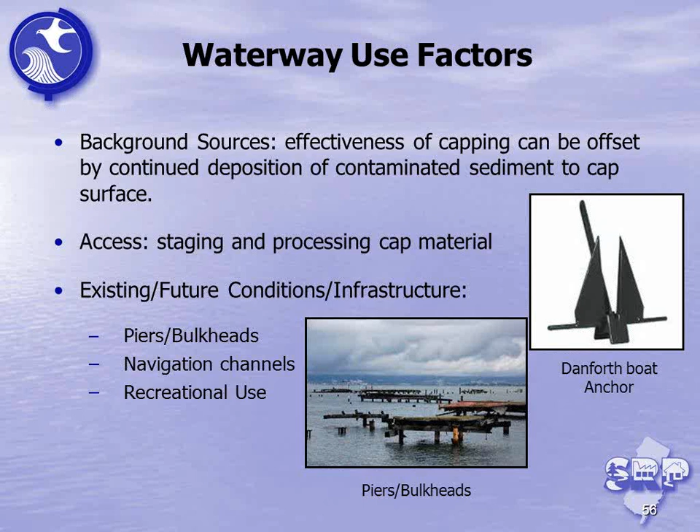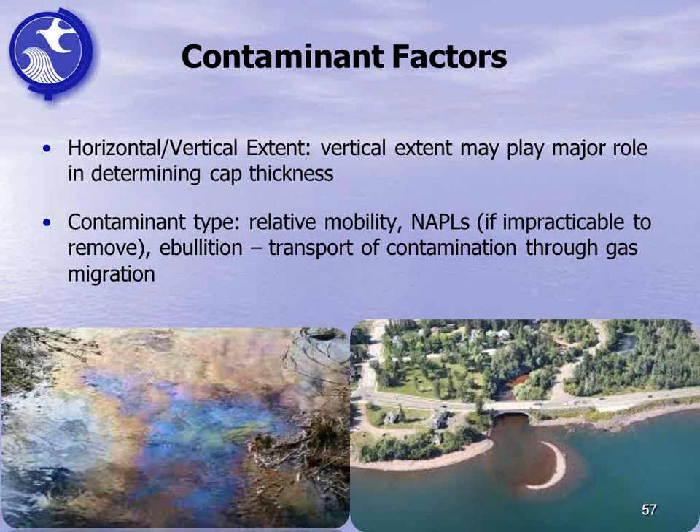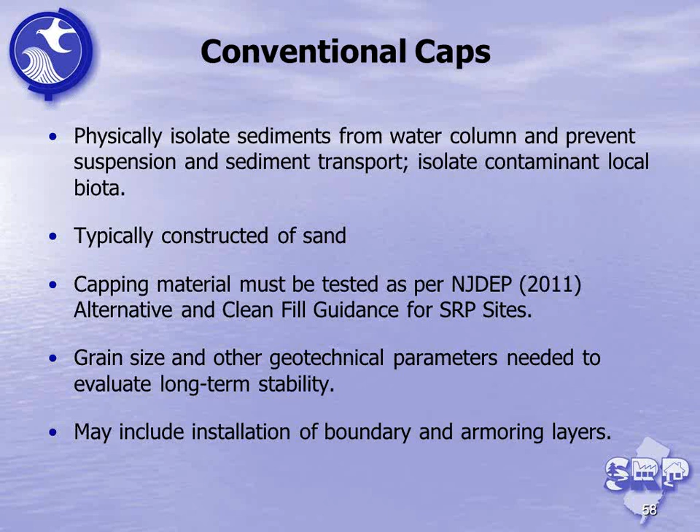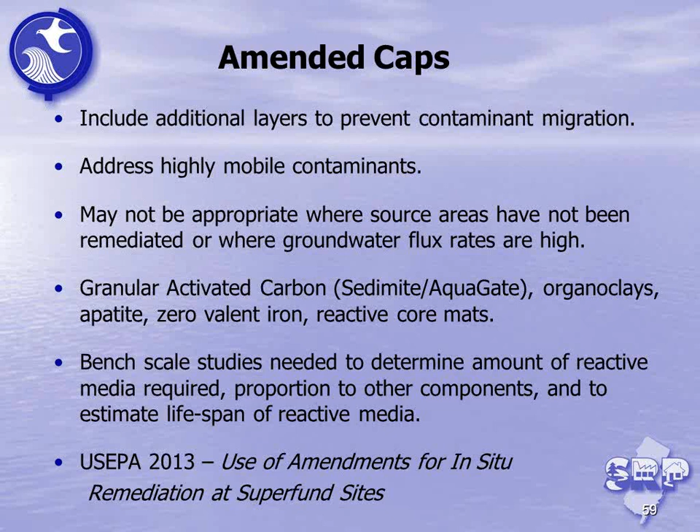Bench scale studies are typically needed to accompany an amended cap remedy, and these help determine the actual amount of reactive media required to be put into the cap in proportion to other components, and help estimate the lifespan of the reactive media. And US EPA has put out a very useful document on the use of amendments for in-situ remediation of Superfund sites, and we provide a hyperlink to that document from our guidance document.

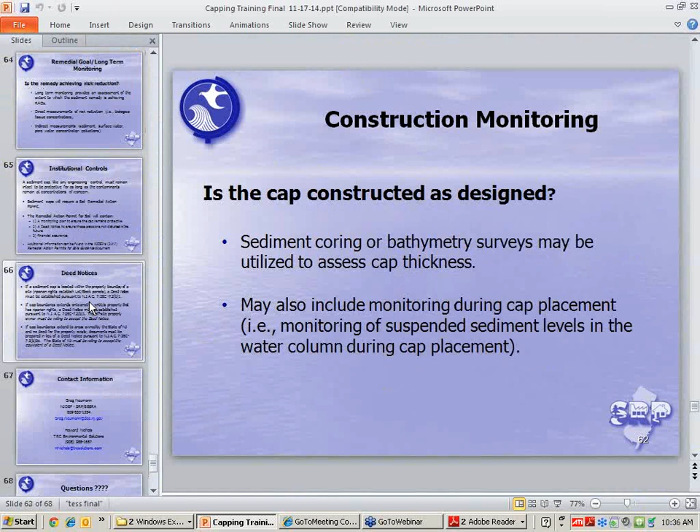Again, they are excelling and showing us that they are paying attention, and I'm sure Santa Claus is going to be good to them this year.

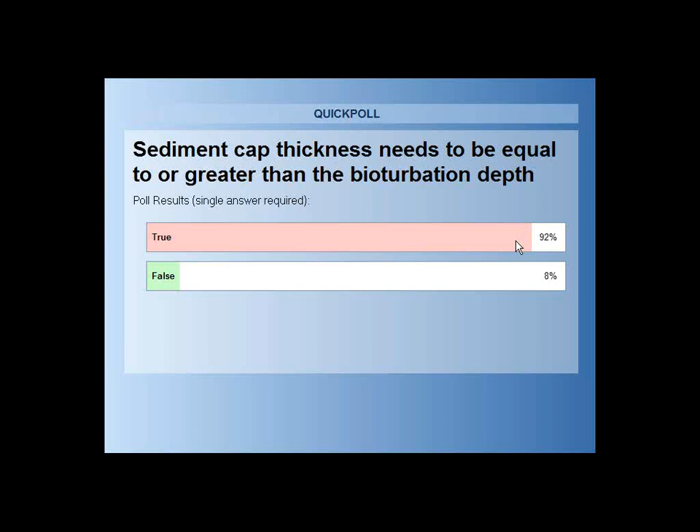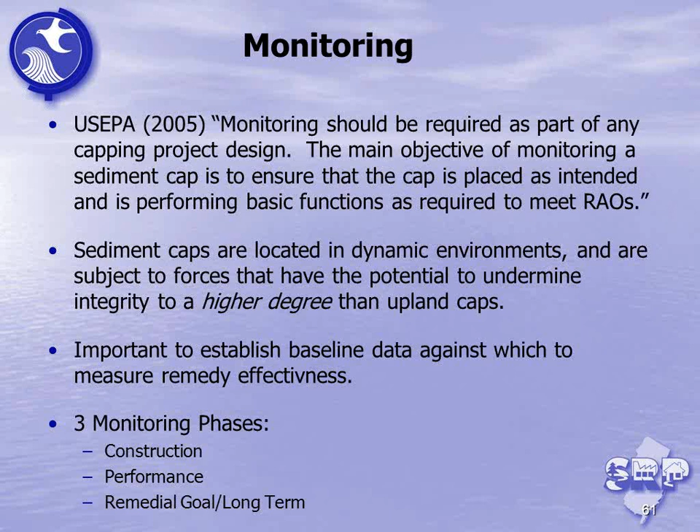So construction monitoring is really geared towards answering the question, is the cap constructed as designed? If the design called for the placement of a 1-foot cap, construction monitoring could consist of either sediment coring or bathymetry surveys to ensure that you've actually met that design thickness and to ensure that that cap thickness is present over the entire area.

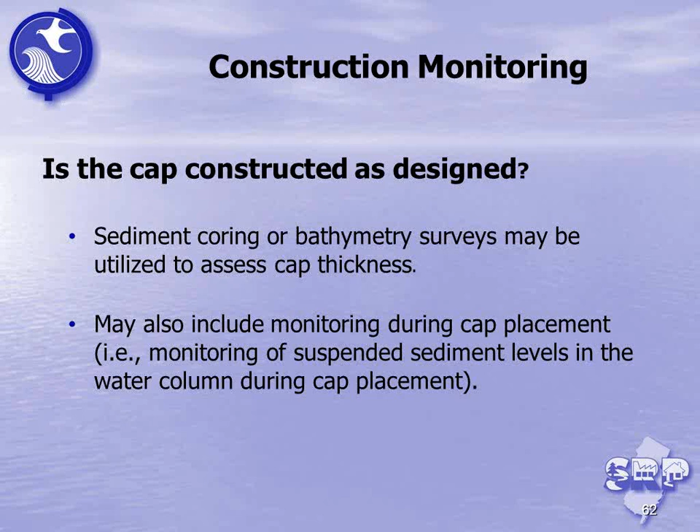It may also include monitoring during cap placement to monitor perhaps suspended solids. When you're working in the water and you're dealing with the bottom of the sediments, you can disturb that contaminated material. You're going to want to control that. That can be done through the installation of silt curtains. Again, the need for that is going to really be site dependent. It's something you've got to consider. Next slide.

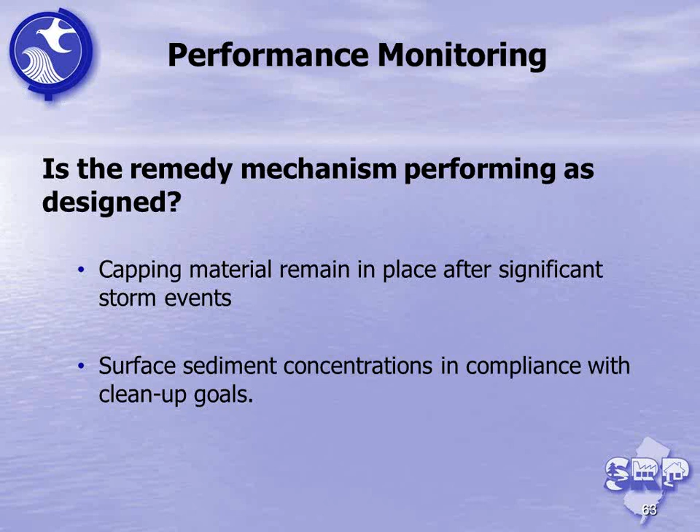Performance monitoring. This is designed to answer the question, is the remedy mechanism actually performing as designed? So again, going back to our 1-foot cap example, is the capping material remaining in place after significant storm events? Again, this could be assessed through sediment coring. If we're dealing with a cap that was put in place to reduce surface concentrations, you could test that through sediment sampling. If it's an amended cap, again, we could test the effectiveness in terms of performance by conducting pore water sampling. Next slide.

Remedial goal or long-term monitoring. Is the remedy actually achieving risk reduction? Long-term monitoring actually provides an assessment as to whether or not your remedial action is achieving your remedial action objectives. We have both direct and indirect measurements. A direct measurement of risk reduction could be if you had fish tissue concentrations above levels for safe consumption. On the post-remedy side of things, did those concentrations actually decrease to where they're safe to eat?

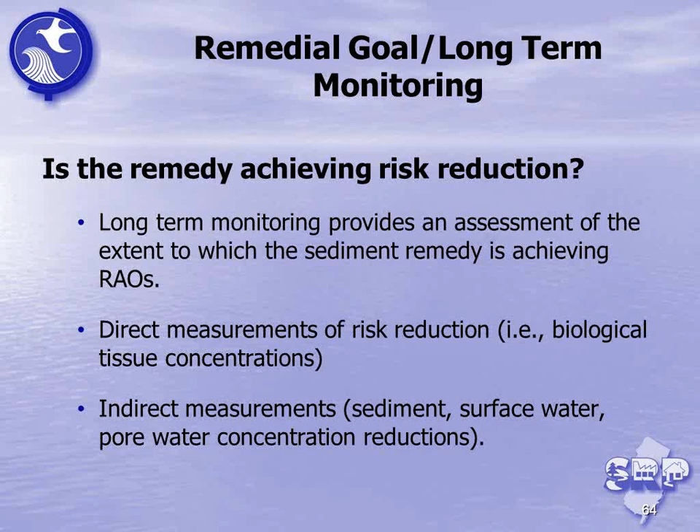An indirect measurement could be sampling the media. You can collect surface water samples. You can collect sediment samples. You can collect pore water samples. That's going to tell you whether or not you're meeting your long-term objectives. So that basically covers monitoring. Next slide.

Institutional controls. A sediment cap, like any other engineering control, must remain intact to be protective for as long as the contaminants remain at concentrations of concern. Thus, the need for monitoring, as just discussed.

To ensure that monitoring takes place, the DEP will require that a soil remedial action permit is obtained for all sediment caps. The soil remedial action permit will contain a monitoring plan to ensure that the cap remains protective, a deed notice to ensure that these areas are not disturbed in the future, as well as a financial assurance.

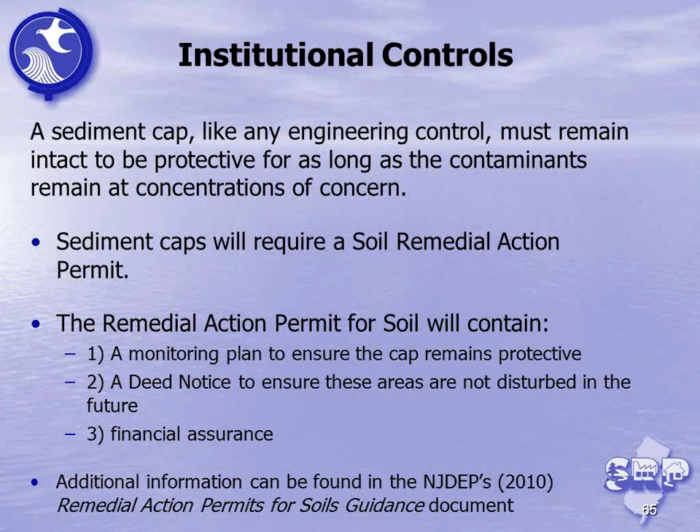I'm not going to go into the details of the soil remedial action permit, but they can be found in the Department's 2010 guidance document titled Remedial Action Permits for Soils Guidance. Next slide.

Okay, deed notices. There's 3 scenarios I wanted to go over relative to sediment capping. If the sediment cap is actually located within the property boundary of a site, which means that that particular site has riparian rights that extend out into the water and establishes lot and blocks, then a deed notice must be established pursuant to Section 7.2b1 of the Tech Regs.

If your cap boundary extends onto another entity's property and they have riparian rights, then a deed notice must be established pursuant to the same citation, but the owner of that site must be willing to accept the deed notice.

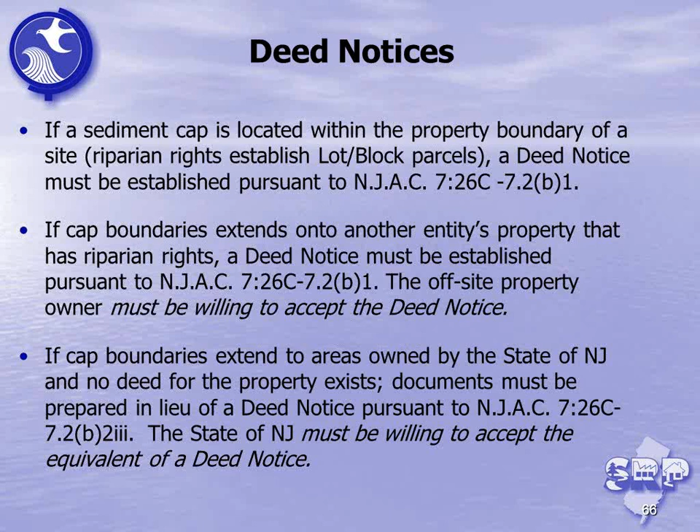And the last scenario here, which may come into play on larger water bodies, if the cap boundary extends to areas of the stream or river that are actually owned by the state of New Jersey and no deed for the property exists, then documents must be prepared in lieu of a deed notice pursuant to 7.2b2, in which case the state of New Jersey must be willing to accept the equivalent of a deed notice.

So that wraps up sediment capping as well as the overall presentation today, and I'd be happy to take any questions. Okay, we'll take some questions if there are any from the audience. Seeing none, we'll open up the webinar audience if there's any questions. Oh, we do have one, well, we got 2, right?

Divang Patel, LSRP. If we have a historic fill near surface water bodies, obviously there's a potential for runoff and maybe contact of water with the historic fill. Assuming there's no runoff, we have the vegetative cap that prevents the runoff. How do you handle the water body that is close to the historic fill material? How do we comply with that, with the potential impact, from a monitoring perspective?

Well, historic fill is usually associated with a regional filling event. So it's typically the rare site where you have historic fill present only on your particular site that's impacting a water body. Historic fill does have to be evaluated in terms of whether or not those contaminants are leaching into the creek or eroding into the water body, and you would compare those data to our screening criteria.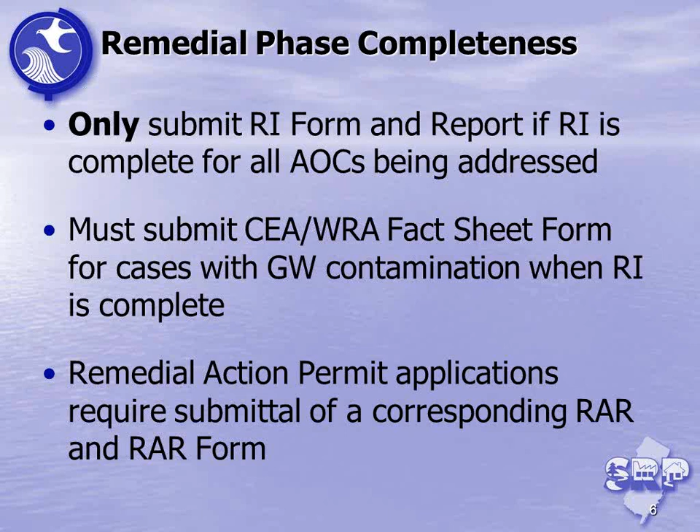One of the major issues that we see with remedial action permits is often the LSRP will make the submission directly to the permitting group, thinking that might expedite the turnaround of the permit. That only causes unnecessary delays because those permits come in with revenue, and the revenue needs to be processed by my office. Sometimes I'm seeing that checks are coming over and I have no idea what the check is for, and then through a little investigative work we find out it's a fee for a permit. The permit went to the permitting group. They started running with it, but just sent the check to my office without the form, and the permit really can't be issued until that fee is paid and is in our system. So those documents need to come to case assignment. Next slide.

Great. Thank you very much, Kirsten. Questions within the audience? Oh, okay.

I'm Judy Byard with the DEP. I have a comment because I review these documents. Quite often the documents are administratively deficient, and sometimes additional annual fees will accrue because of it, especially if we send emails or deficiency letters and the responses are piecemeal.

So everybody needs to keep that in mind to move things along and to make it fair for the responsible party that they don't have to pay additional annual fees.